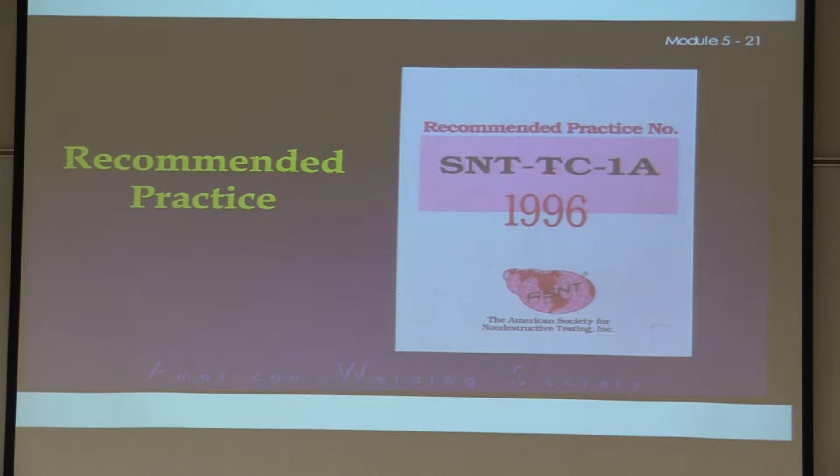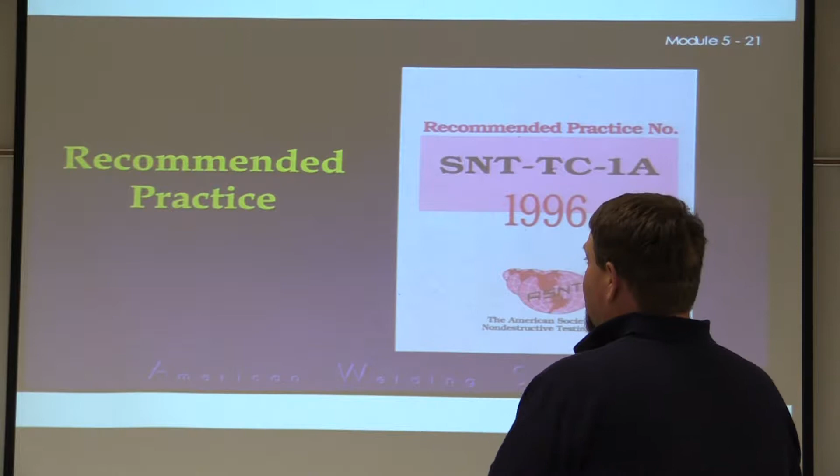This is a recommended practice for non-destructive testing or examination. It's not a code. It can be used in compliance with, or as a guideline to adhere to, a certain code. But as of right now, this is just a recommended practice of how they prefer you do this. Welding codes and standards, for sure.

Let's give you an example of the difference between the two. Over here on the side is AWS D1.1, a structural welding code. Let's look at API 1104, which is API Standard 1104. 1104 is for pipelines and related facilities. Structural steel is a code, and that one is a standard.

And then naturally, we come back and look at this recommended practice here. I know, it's rather confusing. But they all have their special place in everything that we do.

And under standards, we read what the definition was. Second paragraph said some standards are considered to be mandatory. This means the information is an absolute requirement. This is the case for 1104, right? This standard is a mandatory standard, even though it's not considered to be a code.

Moving on, I'm on page 5-7. I'm going to talk about the left-hand column, top paragraph, three sentences down. It starts out, non-mandatory standards include words such as should and could in place of shall and will. You might see that on a test question. What's the difference between the two, or what are they referencing at that point?

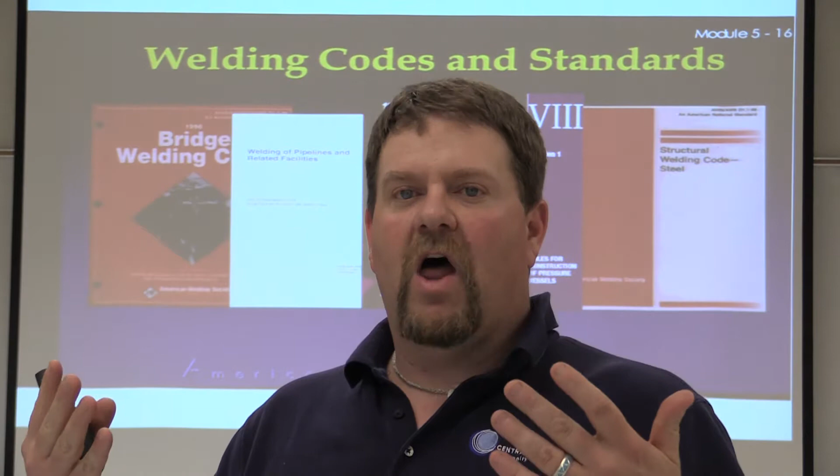Part of the reason there are so many of these is because, from welding and everything else we've learned, when you change the variables, it can do a lot of different things. We can have the same amount of steel that acts differently under structural welding code D1.1, and that same steel under bridge welding, maybe in a high or corrosive environment, acts completely different. Anyone taking materials engineering will say, yeah, of course, we learned that stuff, or it was always frustrating at that point.

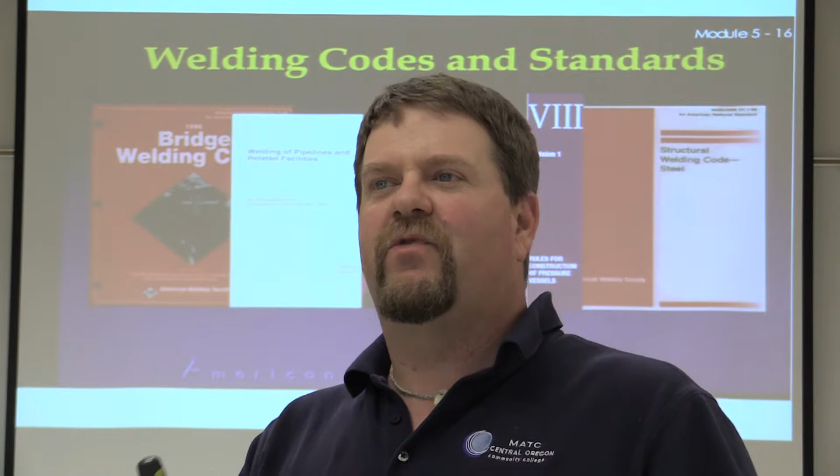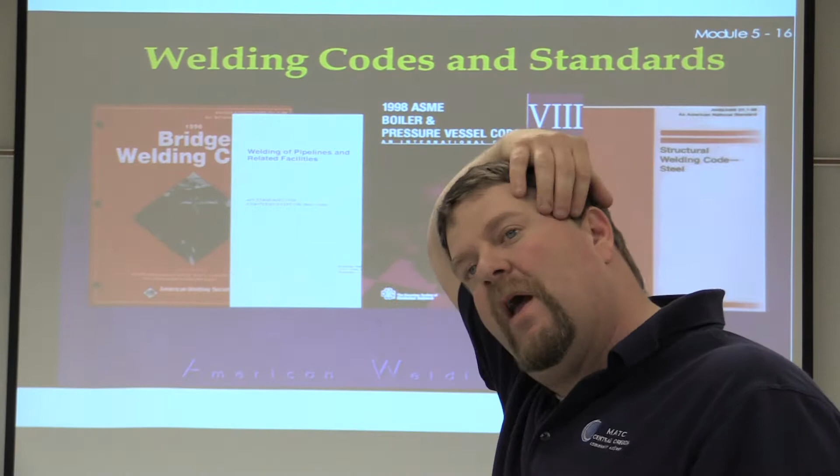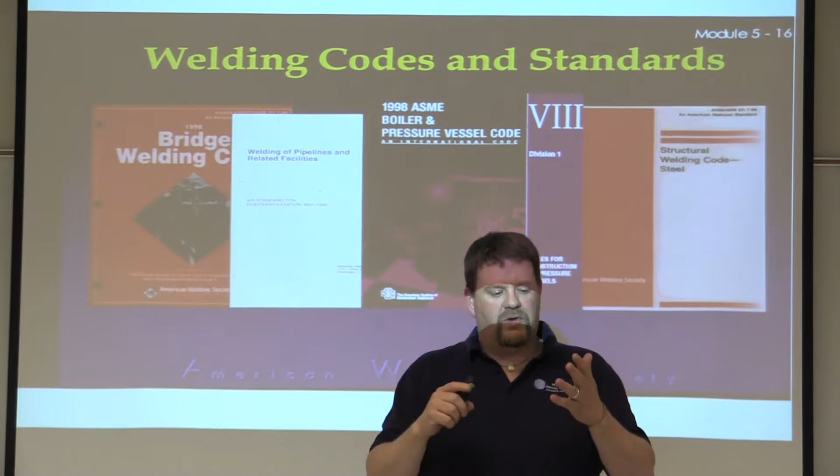But this is the reason there are so many different specs, and some of them are codes which are standardized, and then there's recommended practices. A lot of times the practices will have you refer back to an actual code as well. ASME is a good example. You're always going to be referring back and forth between Section 9, which is welder qualification, and the actual applicable code at the same time.

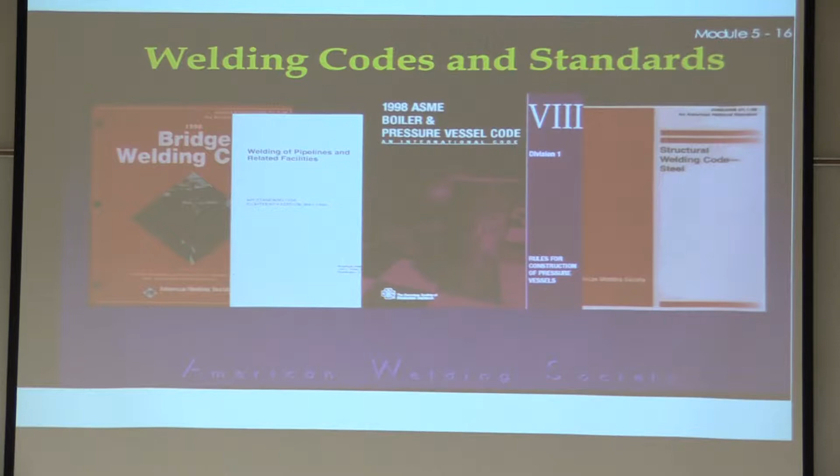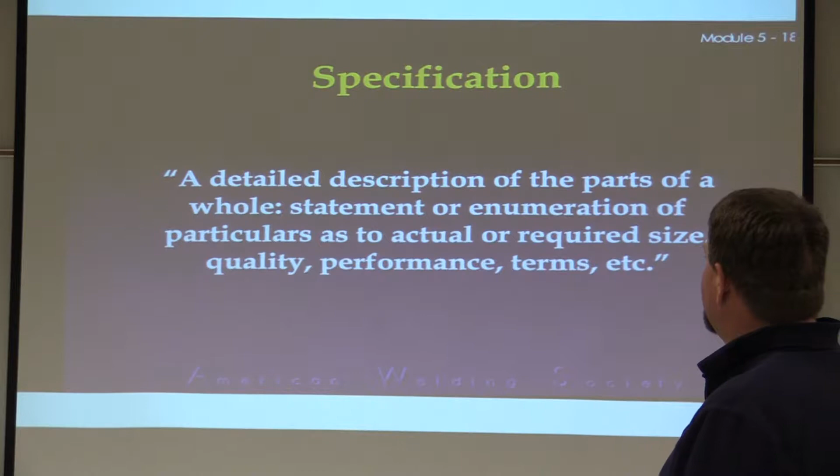Let's talk about specification. We can read the definition here: a detailed description of the parts of the whole. A statement or enumeration of particulars as to actual or required size, quality, performance, terms, etc. Just got the main highlighted piece here.

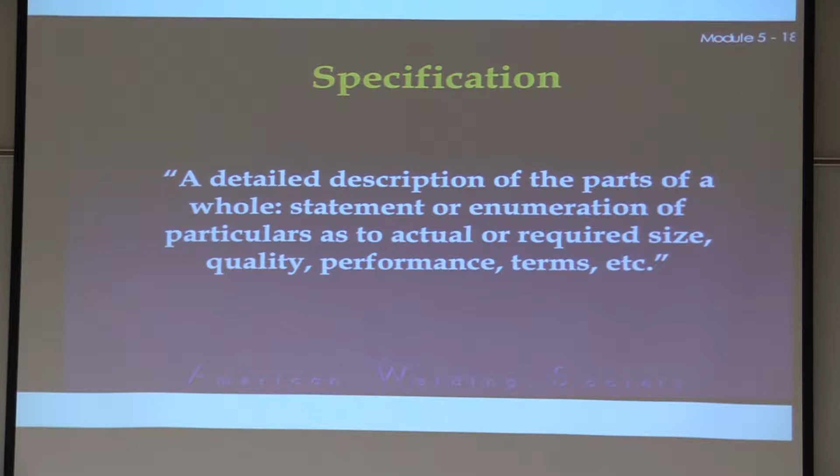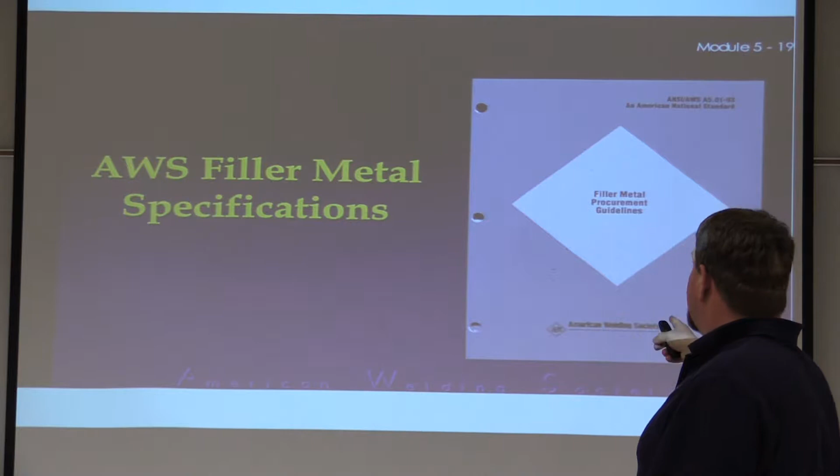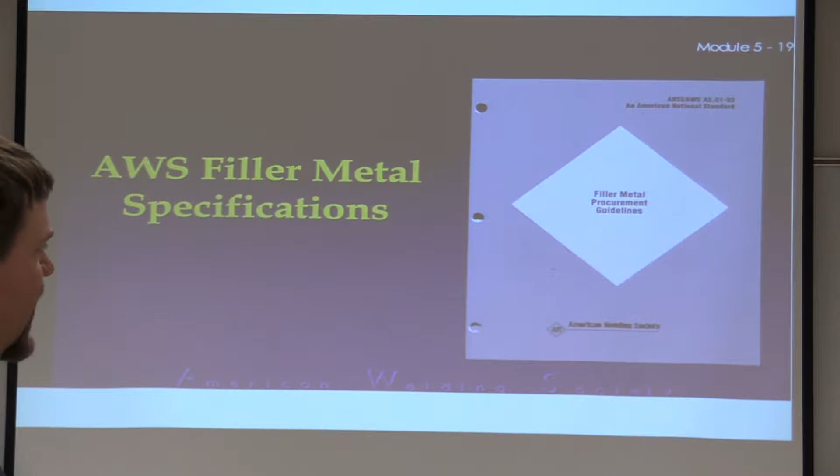Another specification that might be there is A5.01, the filler metal procurement guidelines the American Welding Society writes. You might be using this in conjunction with your D1.1 welding code, or any of them really. Almost all of your other codes are going to apply or reference your filler metal specification. Even ASME's is very similar to AWS. I actually think they adopt the AWS filler metal standards.

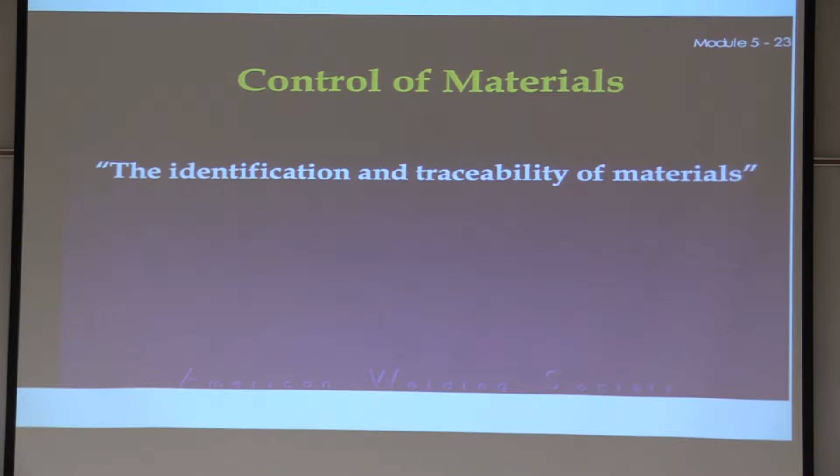Here's specifications, individual ones. Let's get into control of materials. This is extremely important, especially accountability and traceability.

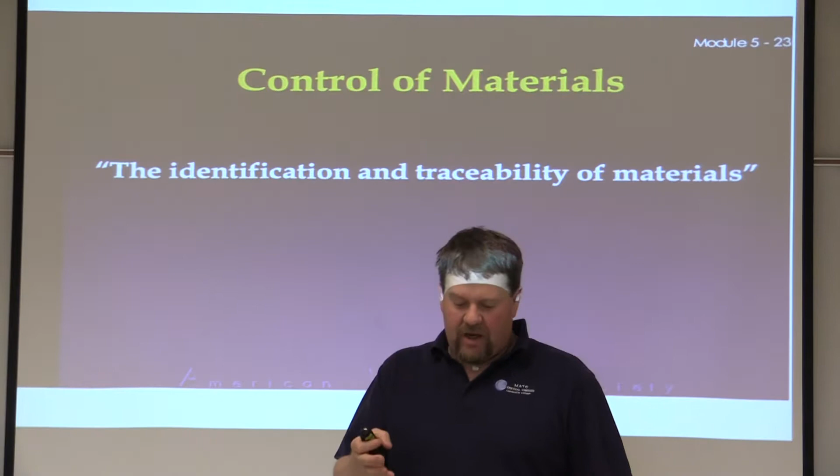So when we talked in chapter 3 about producing an ingot, blooms, billets, or slabs, from that point it can be drawn out into steel, drawn over mandrel type tubing, seamless pipe, whatever the application is that we're going to be using at that point. But it's got to have a heat number, a lot number, to be able to trace it back to when it was produced, what was the chemical makeup of it, what was the minimum yield strength tested, what was the lab report it came back on.

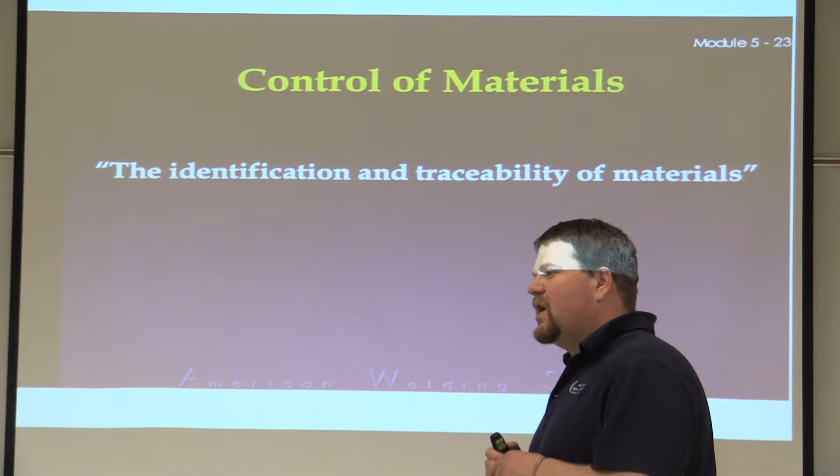So for every time you pour a batch, they're going to pour a separate batch or piece of steel at the same time they pour everything else. And they're going to test this material, breaking it into 3, 4, maybe even 5 different test samples, using it to test multiple things all at once.

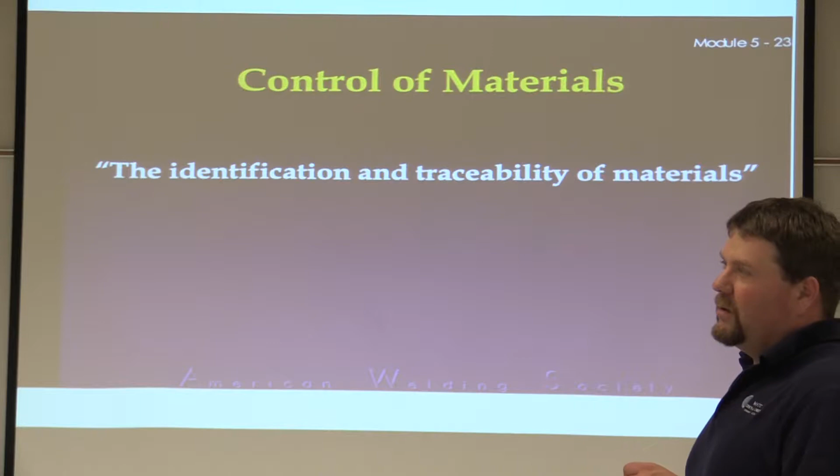That's called your batch, your lot number, your heat number. These are all things that can trace it back to when it was produced, what facility, what the chemical makeup is, what the stress strength is, and what engineering standards it's going to be used in. This all starts on the material test report.

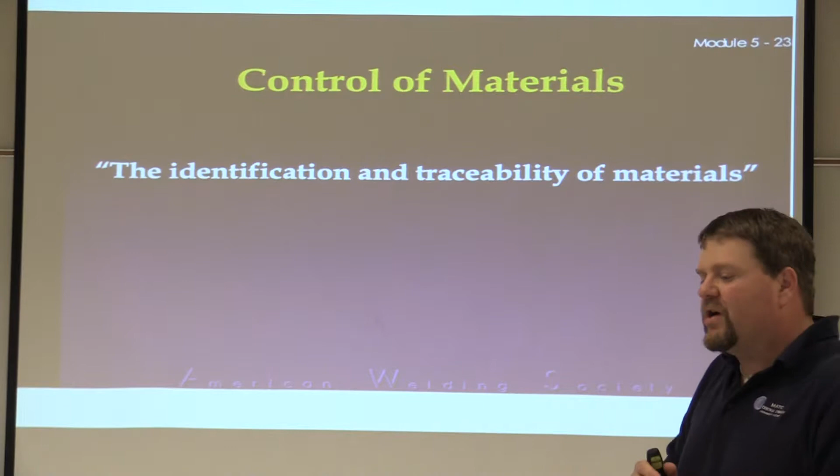We're going to go through this here in a second and break that down. But control materials can be something as simple as this needs to be just like 7018 welding rod. Control materials is exactly like that.

Who's documented when was this box opened? If you're in Portland and it's raining, this box needs to be opened and go into a rod oven almost immediately. If not, it's a bad filler metal and can get rejected at that point if it hasn't been confined properly. So we've talked a lot about just the metal, but filler metals, especially 7018 welding rods, are a huge part of control materials as well.

What's the manufacturer of it? What's the size specification? So if the welding procedure calls for 1/8 inch, you cannot go any larger than that, because that requires more amperage, more heat input, and everything else, which we'll get into next when we start talking about metal properties.

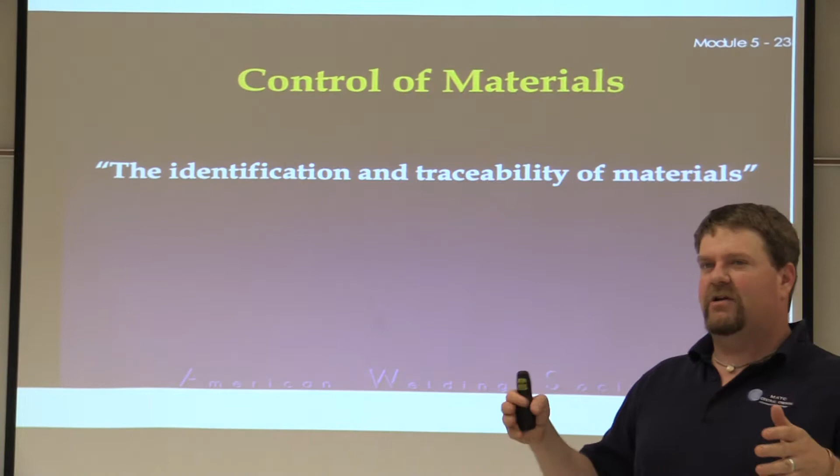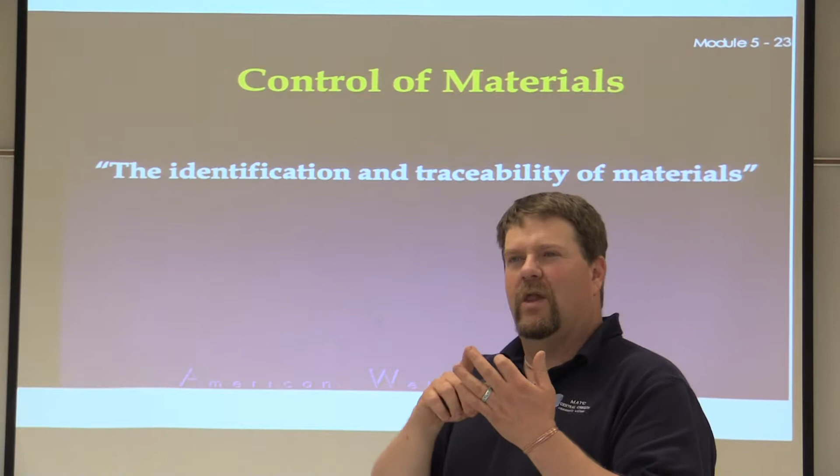But for right now, we're talking about control materials. I want you to start thinking about how these things change and how important they are, especially for any government contract, or anything with a really wild engineering spec, say a bridge or a building. We want to make sure we have a good amount of traceability.

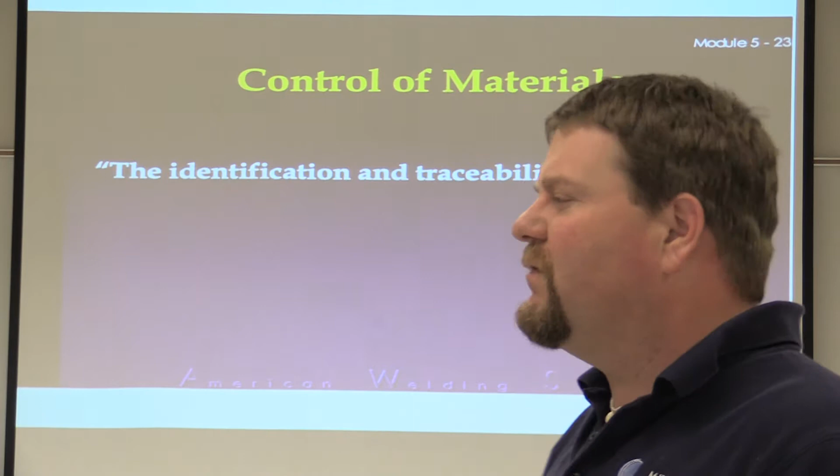Now, for a light fabrication piece or somebody's decorative artwork, are we going to be concerned about it? No, at that point we're really not going to care at all. So that's important because you need to know this.

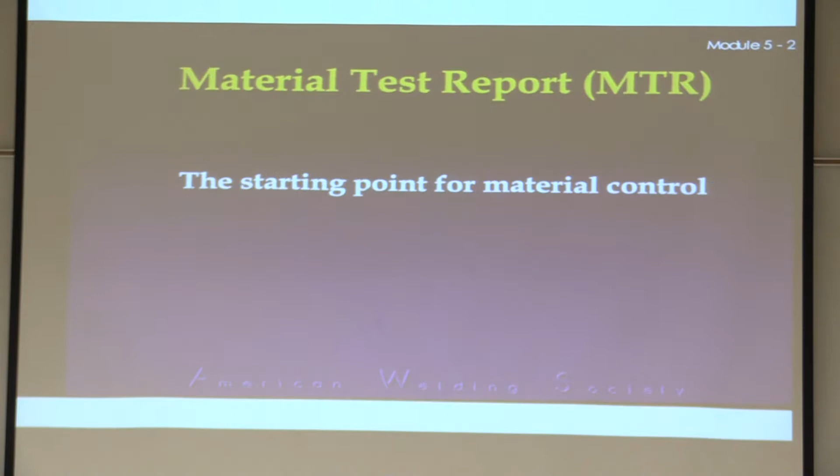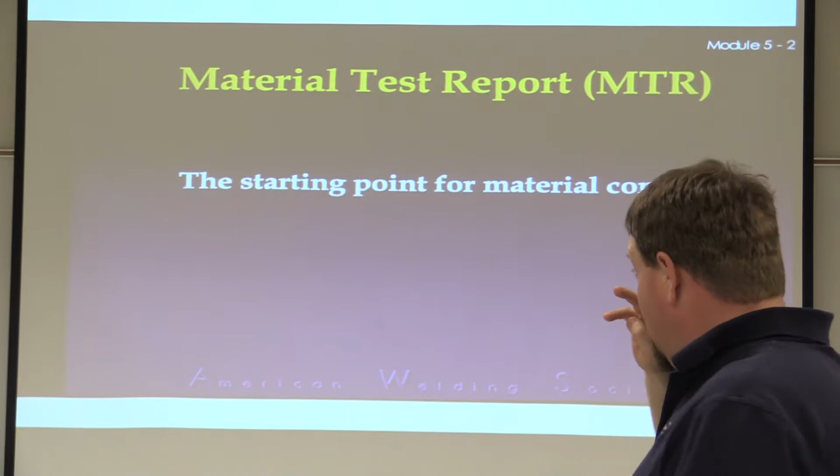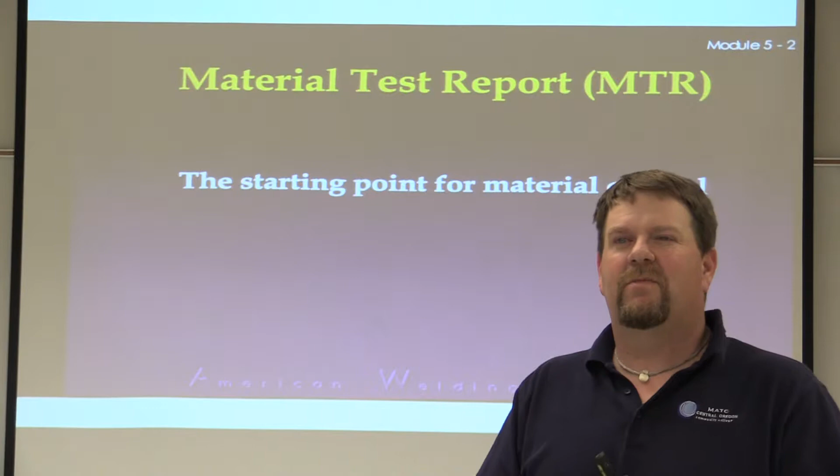When you go to buy that steel or spec it, you need to know exactly what material you're looking for, and you also need to make sure to ask the provider and require a material test report — not just an MTR, but make sure that MTR actually matches the heat number on it.

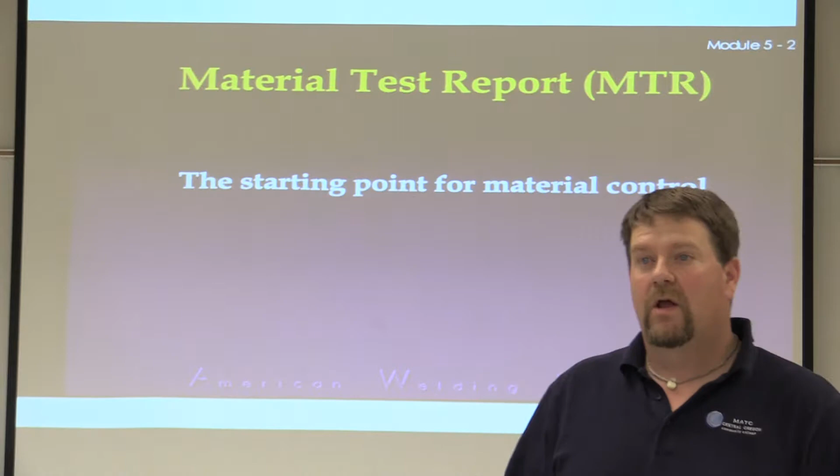Almost all of them have it sprayed, painted on the side, stamped on the side, or it comes with a barcode, things like that. This is the starting point. So this is the batch.

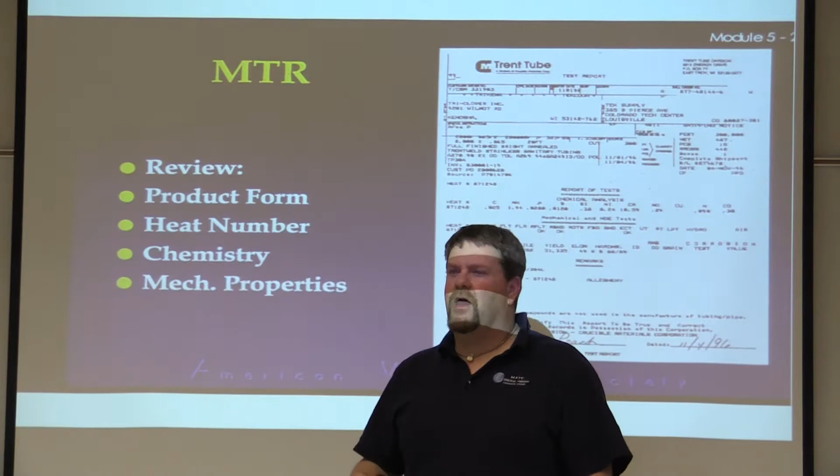Here it's telling you, oh, this is lot number 671249. Here's how much carbon is in it, manganese, phosphorus, silicon, nickel, chromium, molybdenum. It's telling you the chemical makeup that came back out of that, and that's really important to understand and know.

And then if you look further down here, that was just the chemical analysis. Now we're looking at mechanical and NDE tests. So did it come out right with visual inspection? Was the grain pattern correct?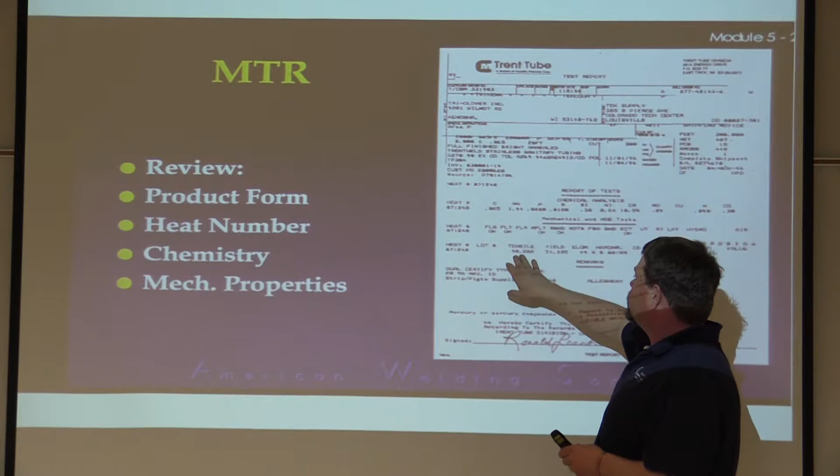And then down here, let's look at the tensile strength — here's the minimum yield strength of 51,000, if the tensile strength's at 98,000. These are the types of things we're getting into, and it'll tell you all of that stuff, the date of manufacture, the date of the pour, where it came from, where it originated. This is going to be global — it isn't always just here within the local U.S. This could possibly be global.

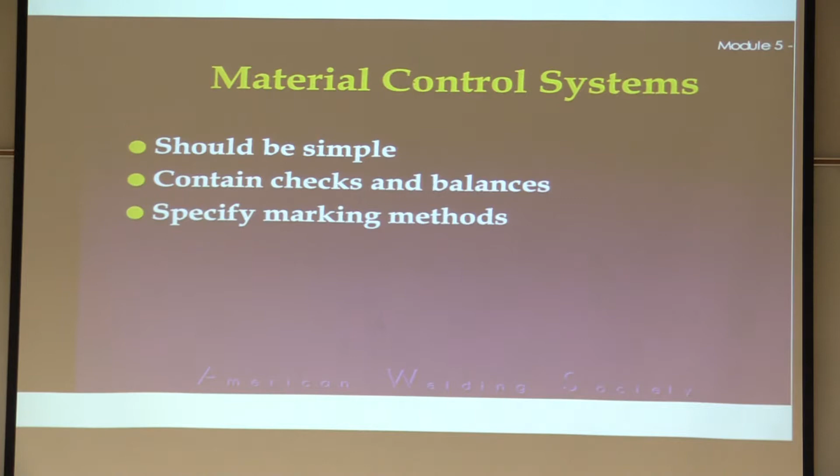Your material control system, try to make it as least complex as you can. It's the best thing I can tell you, because the more complex it is, the harder it is to follow.

I'll give you an example. We occasionally will buy some tube in here, and we make sure to get the MTR report. So if we're going to take a qualification or certification test on it, I have to keep track of that. We as a facility do.

One of ours, if you go out and look at our pipe, it may have a yellow paint strip down it. So what we're going to do on that MTR is pull it in. It's 2-inch pipe, Schedule 80, and we're going to say yellow paint stripe received on this date by this person, this is how many feet of material we got out of that. We make sure the heat number matches, the lot number matches, and everything else.

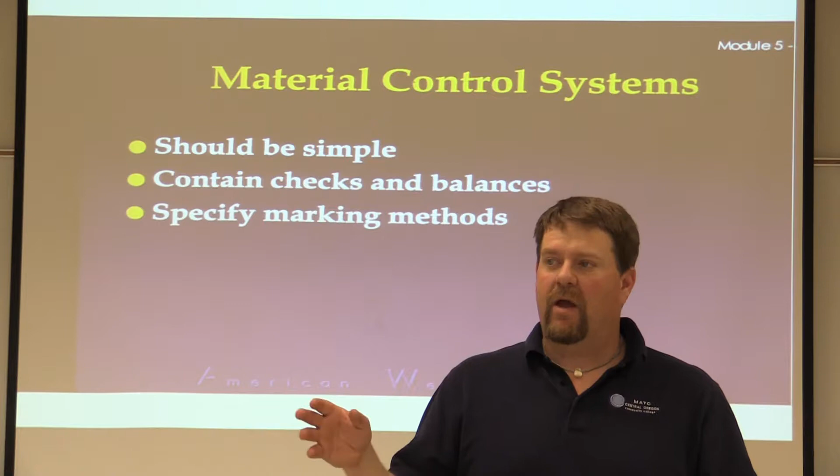Then as soon as that yellow one is produced, I'm going to come in and document over top of it that the last piece was used with the yellow stamp or yellow paint marker, and the given date at that point. Then the next piece that comes in might be a blue piece, and I'll put a paint stripe down, and that's my traceability. That's some simple systems, okay.

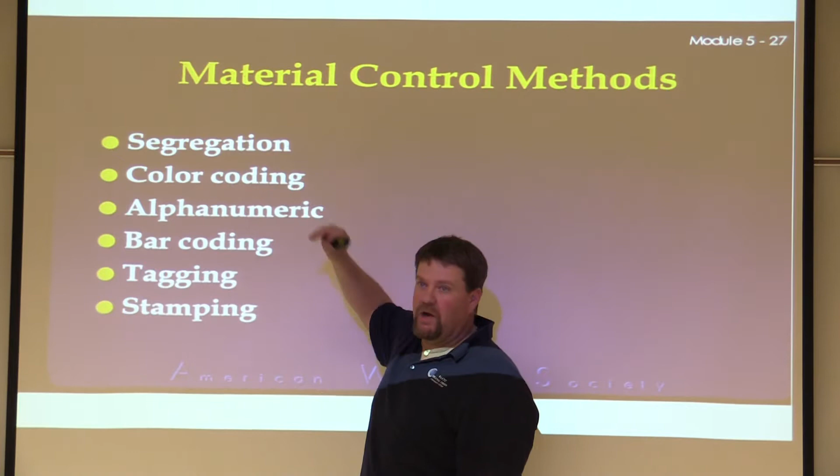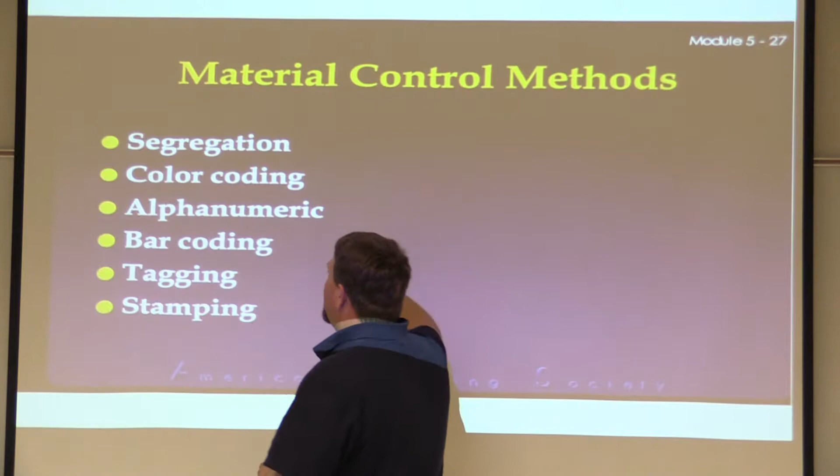So when we talk about color coding, that's what I was just describing. Some smaller shops might use segregation, so you might have 4 different iron racks, and only certain materials will go to certain racks and come back. You can do alphanumeric, barcoding, tagging, stamping, however you'd like to do it.

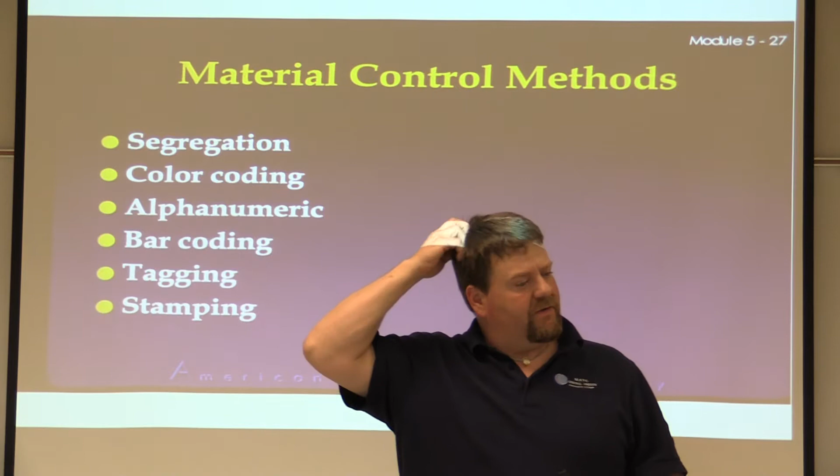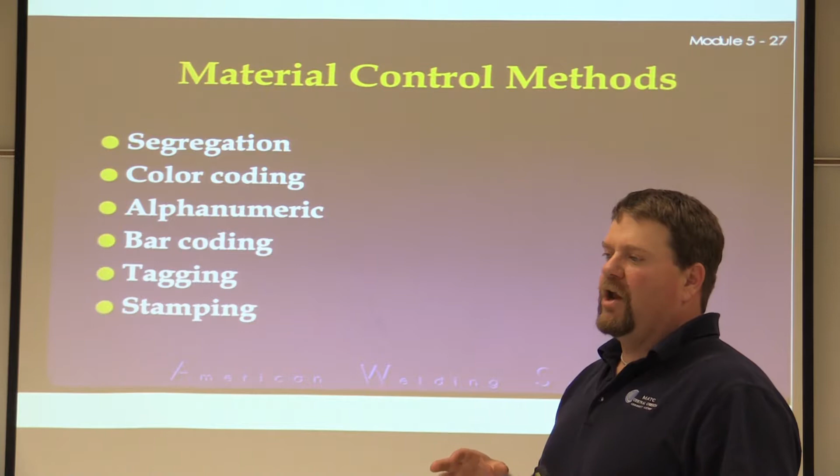But again, make sure it's not complex. For example, with tagging or stamping, if you're going to stamp it, remember you've changed the metallurgical fact a little bit. That might be a notch toughness issue. If you cut that corner off and it's got a stamp or tag on it, you need to make sure you put that on the other corner of that piece of plate. Make sure you're keeping the positive material identification.

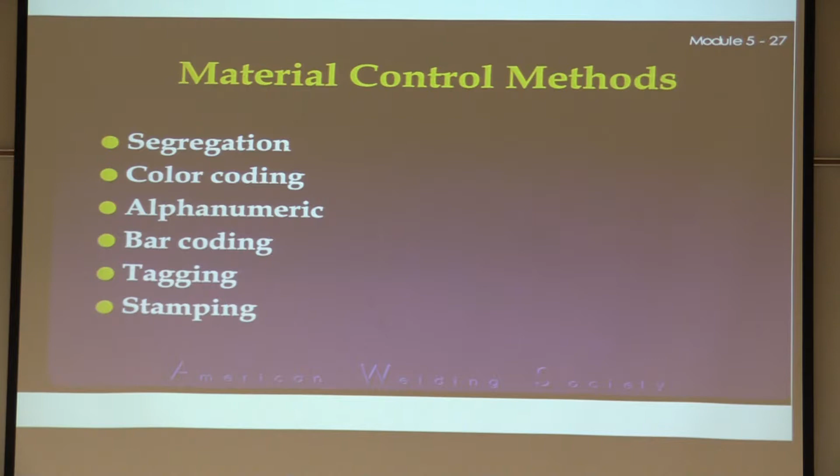It's finding its way into the industry. I'm on page 513, left-hand column, halfway down. It says a successful system for material control has several attributes. First, it should be as simple as possible, because if it's too complex, it's hard to follow. So the next page and a half talks about all these methods. Work your way through them.

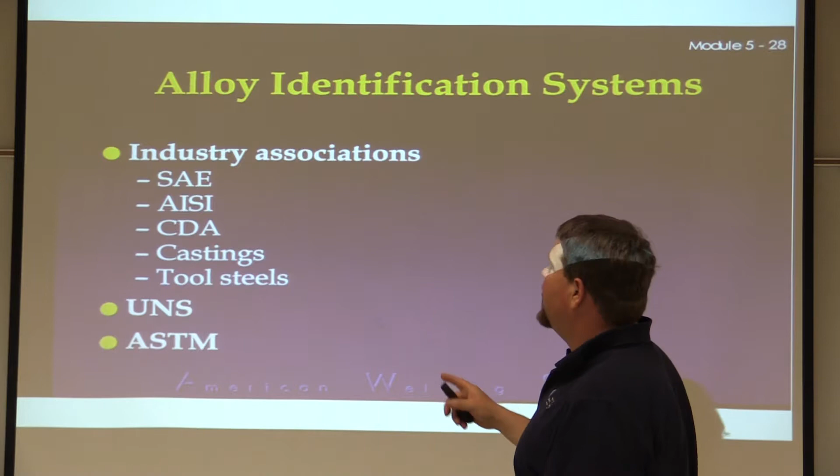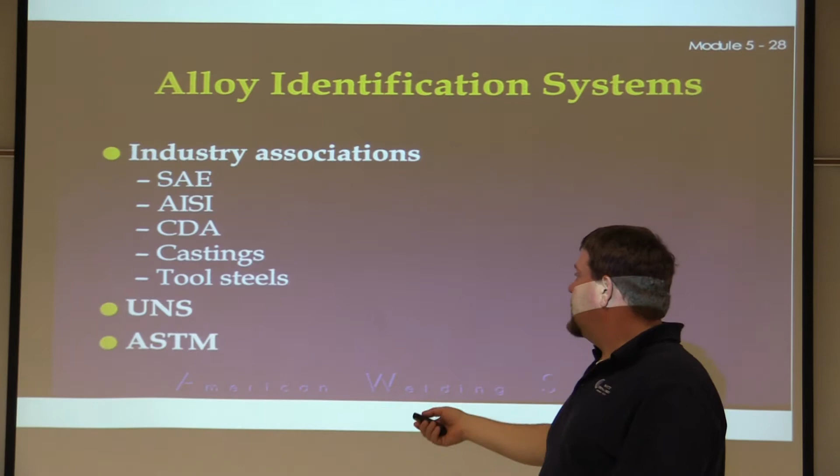Now we're going to move into the alloy identification systems. Industry associations - SAE, AISI, so the Society of Automotive Engineers, the American Iron and Steel Institute, and all these other ones as well, okay? The American Society of Testing Materials, right here, the Book of Standards.

So these are going to tell you the alloy identification, the material properties, the mechanical properties. Particularly in this one, it's volume 3, metals and mechanical testing of low temperature tests. And why does that matter? We're going to talk in chapter 6 how metal reacts differently when it's cold versus hot. It's directly proportional in steel and iron - the hotter it is, as you can imagine, we bend things once we get them hot, but when they're cold, they can be somewhat brittle.

So here we talked a little bit about standard 514 - standard spec for high yield strength, quenched and tempered alloy steel. Might be HSLA, high strength, low alloy, correct? So forth, this is on page 514.

Feel free to read through this and get yourself familiar with the primary UNS numbers. We've talked a little bit about this in metals prep at this point as well, so I'm not going to hit too much on it. Remember, come ask questions if you need them.

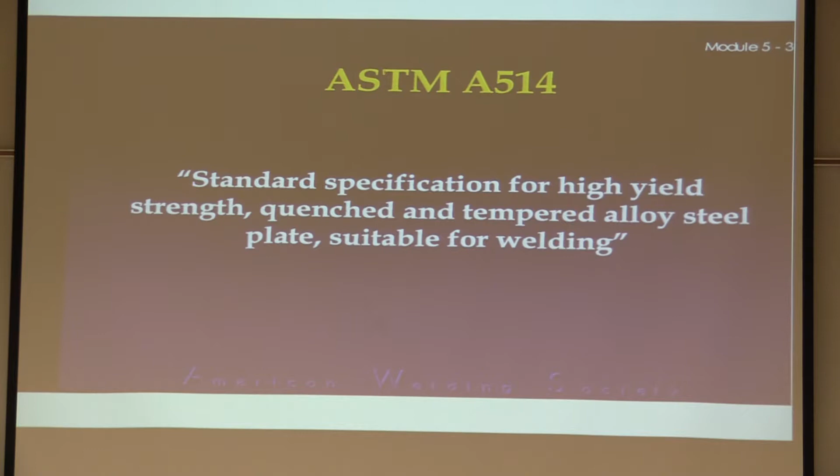Particularly, I want you to look at the scope of this. The scope statement explains exactly what is to be described by the specification - that is, it defines the limits of the spec's coverage. So in this case, it may tell you this aspect is particular to this process or this material, or only 2-inch pipe, or only round steel for this amount of material. If it changes, then you may have to go to a different section.

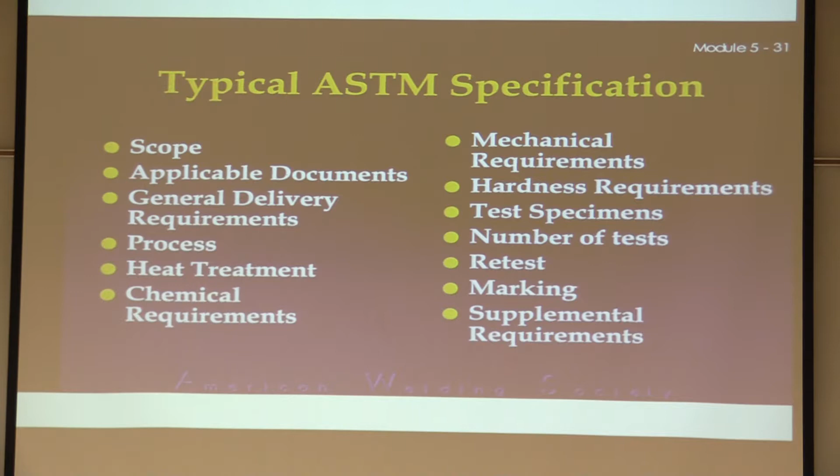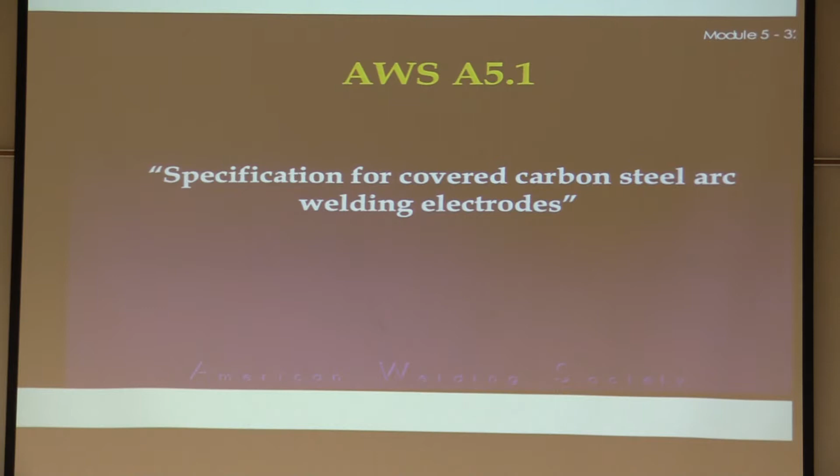AWS A5.1, the spec for welding electrodes, that's on page 5-16. Feel free to read through it. We'll talk a little bit more about this with Charpy V-notch and everything else later on.

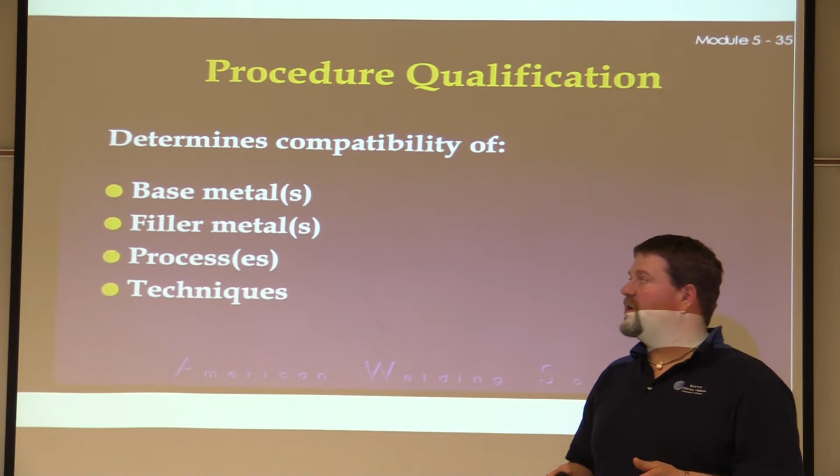Here's mainly where I wanted to get to, was the procedure qualification. There's a lot of stuff in here, so we're on page 5-16, right-hand column halfway down. Now we're starting to talk about welding procedure specification versus procedure qualification record versus WPQR, welder performance qualification record. So the procedure qualification determines the compatibility of the base metal, the filler metal, the process, and the techniques.

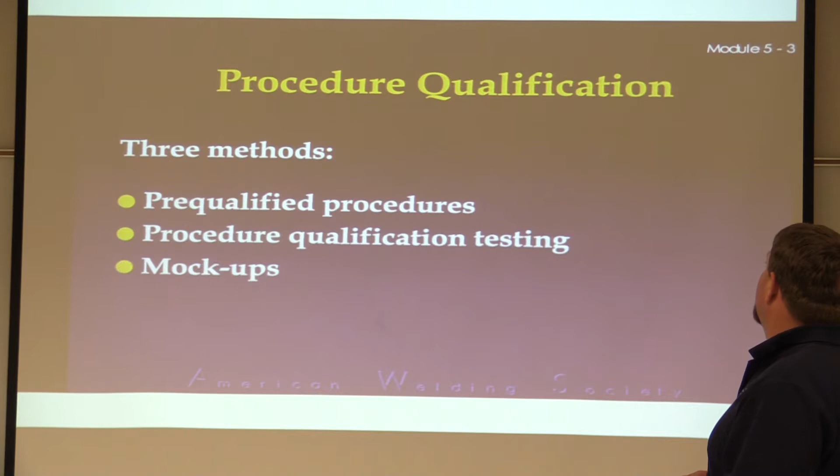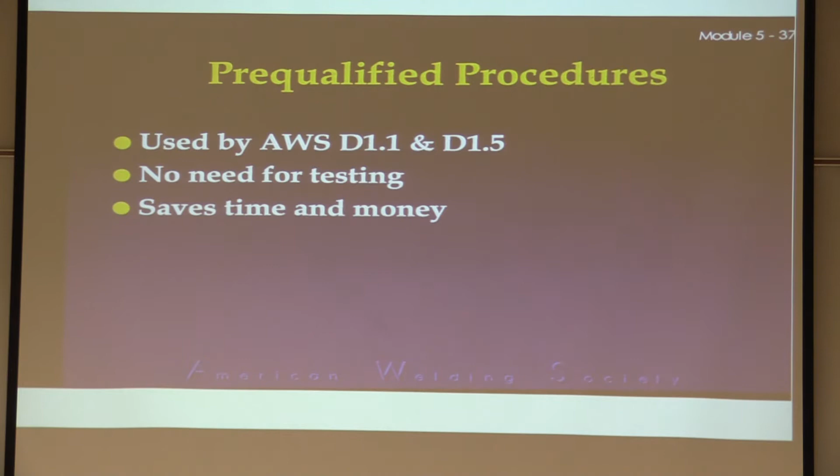I kind of need to do a little bit better job of this, in my opinion. So I'm going to read from the book here, left hand or right hand column, three-quarters of the way down. That paragraph starts out: most codes place the burden of responsibility for qualification on the fabricator or the contractor. Therefore, welding qualifications are statements by the company verifying that the welding procedures and personnel have been tested in accordance with the proper codes and specifications and found to be acceptable. So you can have, and we'll talk here in a little bit about pre-qualified procedures, but again, you can be qualified versus certified.

Probably the three best ways I'm going to explain this, and they do a bad job of saying this: the first thing you have to have is a specification. So the welding procedure specification is going to tell you the overall scope, so to say. That's going to say it's going to be a pre-qualified procedure, it's going to be D1.1, say it's our unlimited thickness 1-inch groove plate. So that specification is going to give us the outlines and the guidelines of what we can do.

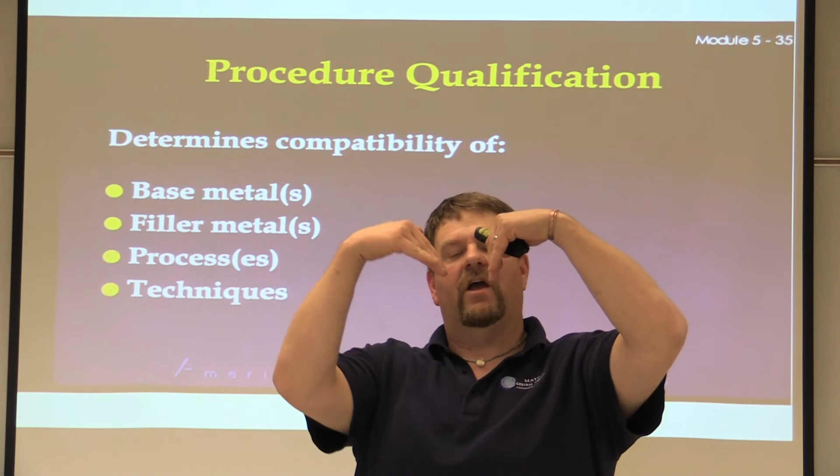So the best way you'd need to start with any of this is you'd have to say, here's what I want to join together. I want to join these two pieces of 1-inch steel together. I need one of them to be flat, I need the other one to be beveled, and I'm going to say a 30-degree bevel, and I want this much of an opening, and I want to weld them with 7018 all the way, and I'm going to see if that sticks together.

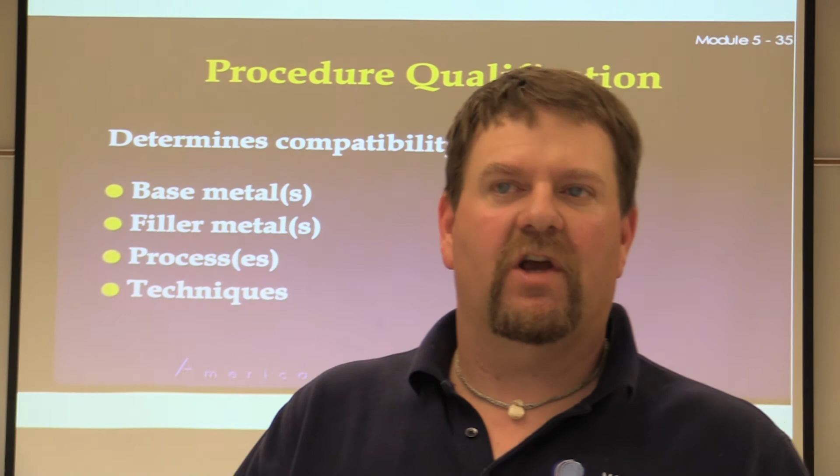So, in order to write a WPS, it's kind of like who came first, the chicken or the egg, right? We know that we want to get the chicken out of the egg, but which one do we have to do first? So the procedure qualification is just that. We're going to decide what we're welding: the 1-inch straight, 30-degree bevel, A36 steel, with a backing strip, 7018. That's what we're going to do. We're going to do it in a vertical and an overhead position.

We're going to use 1/8-inch electrode. We're going to watch the heat input, we're going to time it, we're going to measure everything: how much amperage is going into it, how much voltage is going into it, how much heat input is into it. We're going to do that off of a formula because we're going to time you. When you strike an arc, we hit a stopwatch.

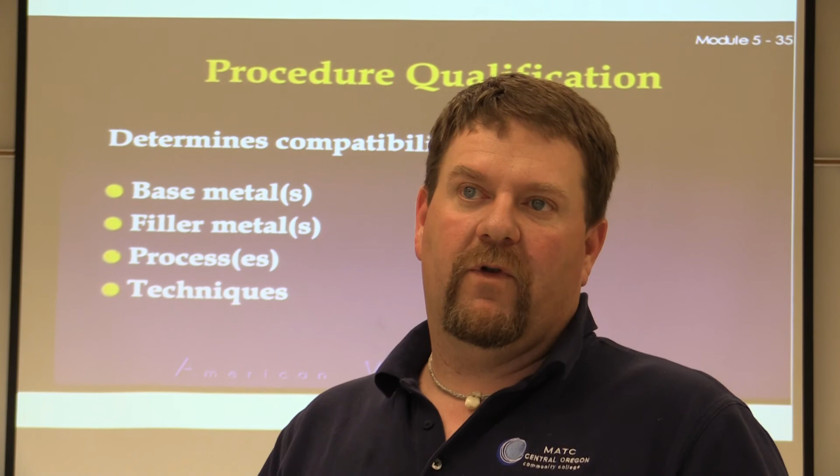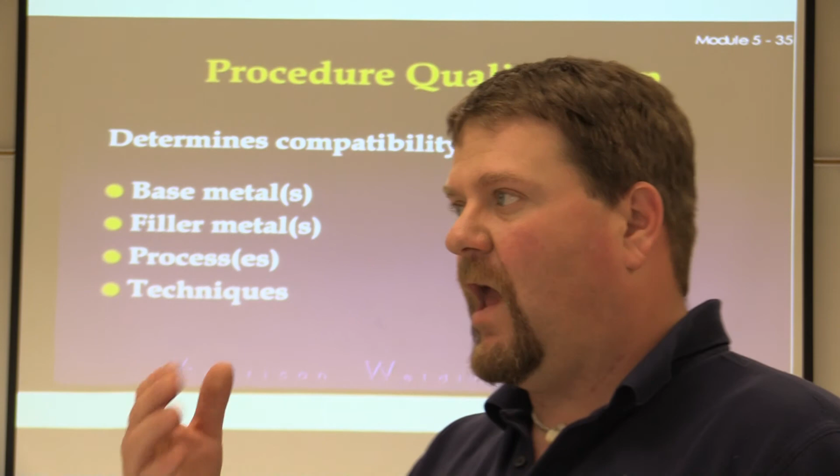You're going to weld for 28 seconds. We stop it, and then we're physically going to measure how far you welded, and then put that equation in there versus 60 seconds per minute. Then we can transfer that over to amperage, voltage, our heat input, and everything else.

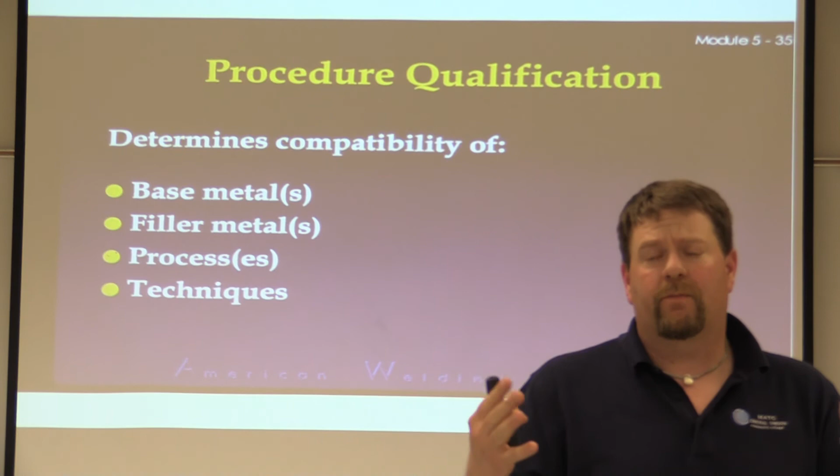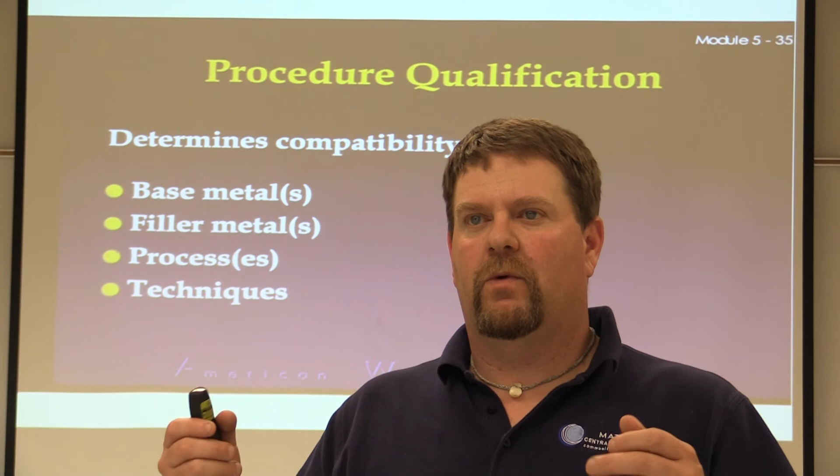So we do all of that, and then we weld it. We can either preheat it, and a lot of times you'll do maybe one preheated at 250 degrees, one as-welded, or 70 degrees plain temperature. Then you're going to see if the difference between the two works out as we go to test it.

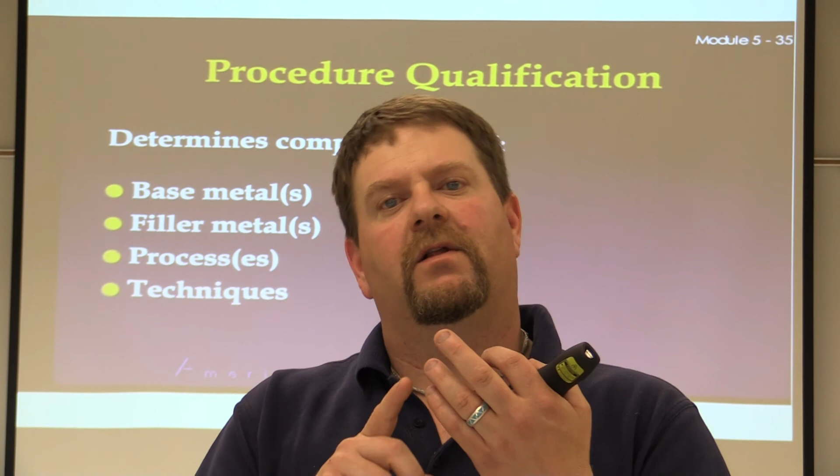So we've got two of them welded, exact same thing, one at an elevated temperature, one at a base metal temperature. If everything matches the spec, so we follow the code guidelines of, say, AWS D1.1, the undercuts within visual acceptance, the weld profile is correct, everything else meets spec, it's a good weld.

Then we're going to cut it up into the pieces that we're going to try, and we're going to test it. Now we're going to be mechanically testing it.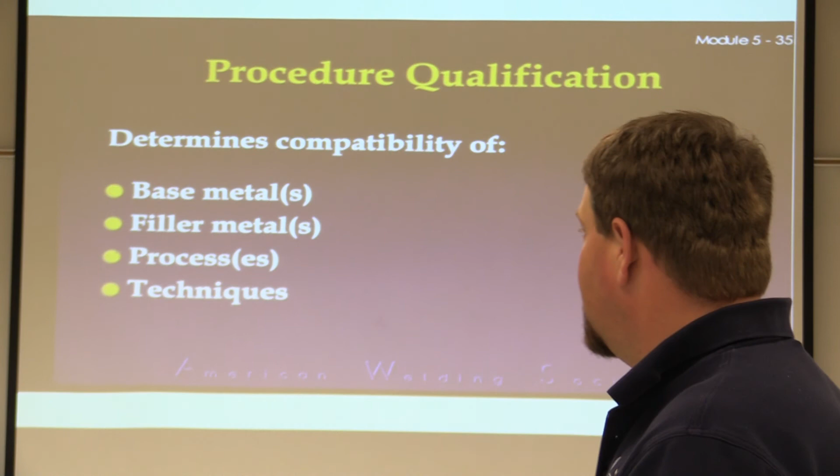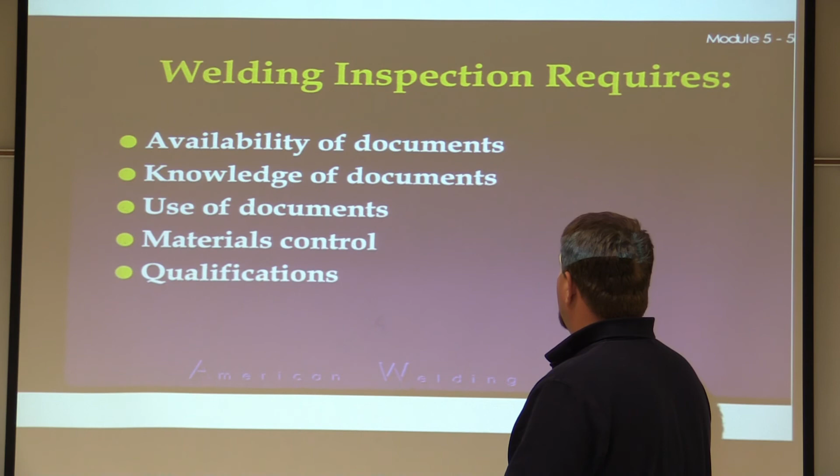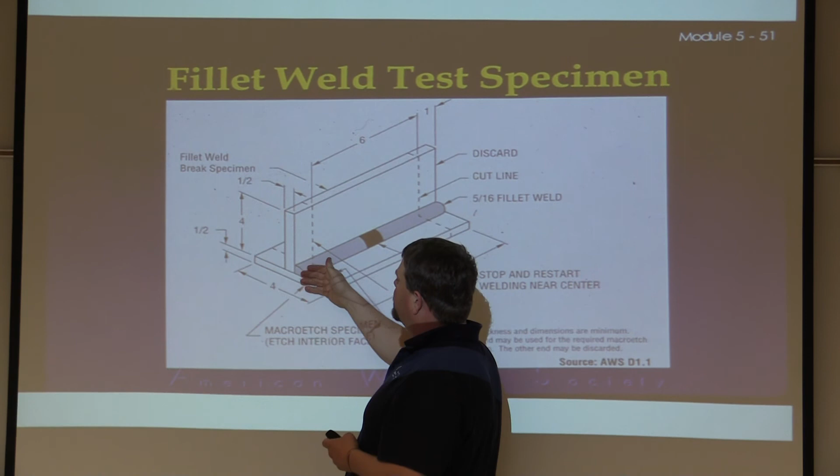I'm going to skip forward a little bit ahead. So we're welding this one here. But now, here's a fillet weld, but it gives us the guidelines of where we need to test and where we don't need to test.

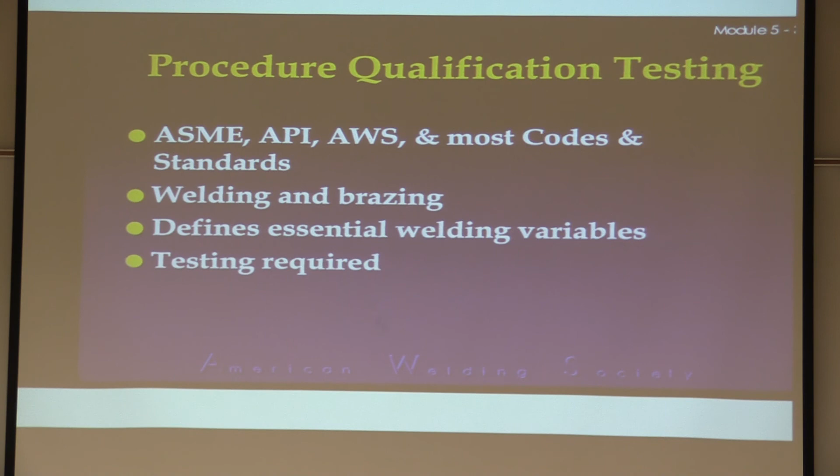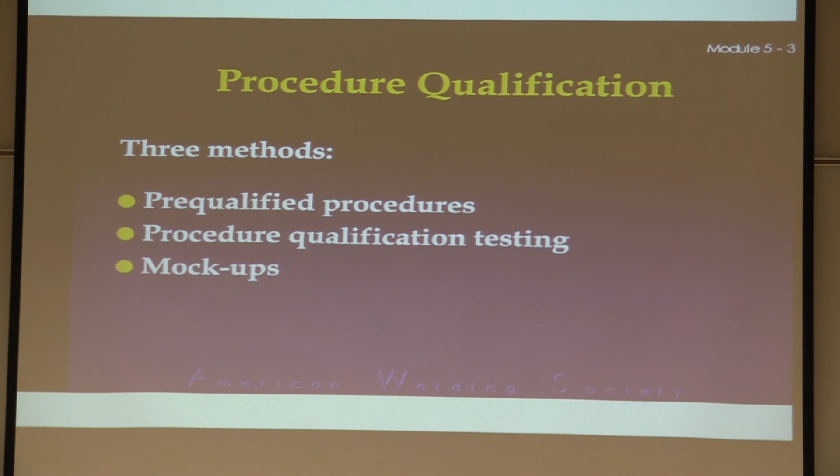So I'm going to come back a little bit. My lights went out on me. Give me a second, let me find some paperwork. And we'll continue back.